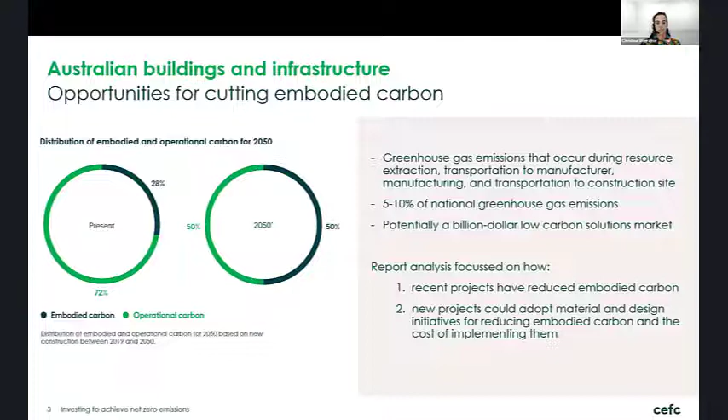And with that in mind, the analysis for the report focused on 2 key areas. Firstly, an analysis of how recent infrastructure and building projects have reduced embodied carbon. Now that's based on data from the ISC and the GBCA. And secondly, in an Australian first, an analysis of how new projects could adopt material and design initiatives for reducing embodied carbon, as well as the cost of implementing those initiatives.

Christina, can you please... now it changes. Oh, sorry.

So for the recent projects, the key findings were, on average, the sustainability rated infrastructure projects assessed are achieving a 33% reduction in embodied carbon. Now that's compared to a similar design with no sustainability measures incorporated. For the building projects, the average reductions were 15%, but we do note some individual projects are achieving significantly higher emissions reductions. Now for new projects, the analysis of material and design initiatives found that cost-effective solutions are available today to substantially reduce embodied carbon.

Depending on the initiatives implemented, it's possible to achieve a 5 to 18% reduction in embodied carbon, whilst also saving 0.4 to 3% in the cost of those materials. Key initiatives for cutting embodied carbon emissions whilst also saving on costs include precast concrete, low carbon concrete, and pleasingly engineered timber.

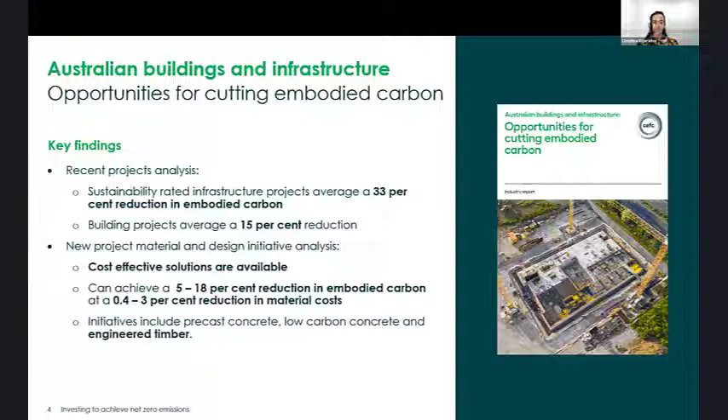The report found that the use of timber can reduce embodied carbon by up to 75% compared to the use of conventional steel and concrete. So on the back of these findings, we've just launched our $300 million timber building program. Now, this is a debt program to encourage mass timber construction across the property sector.

Projects will be considered on a case-by-case basis, but should utilise low-carbon engineered wood products in large-scale construction, involve appropriately sourced and accredited materials, and achieve sound embodied carbon outcomes. Require more than $20 million in CEFC debt finance, be commercial and deliver a positive return to the CEFC, comply with our investment policies and guidelines, and it's open to Australian-based projects across all property sectors.

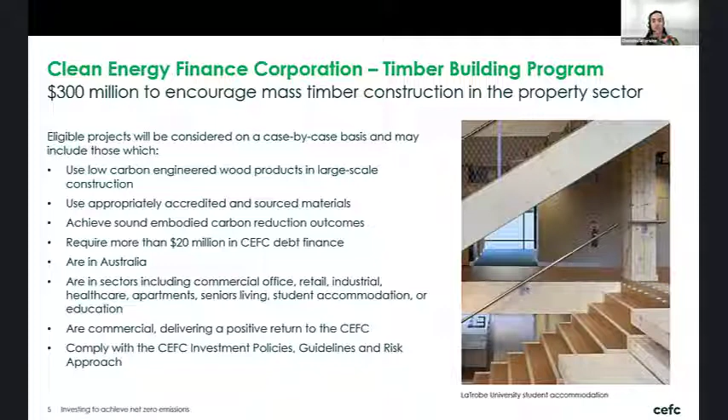So as well as helping achieve substantial embodied carbon savings through encouraging mass timber construction, we hope the program will also help develop local skills and experience, supply chains and delivery capabilities to catalyse even more timber-based building activity into the future. And if you'd like to know more about the timber building program, you can visit our website, which has a really handy fact sheet as well.

I'll now briefly touch on some of the investments the CEFC has already made to address embodied carbon. We have a $95 million commitment to the Roe Highway Logistics Park in Western Australia. That project uses Boral's low-carbon concrete that achieves up to a 42% reduction in emissions compared with traditional concrete. So this, along with some other features, will enable the project to achieve carbon neutrality.

A $75 million commitment to Frasers Property is targeting embodied carbon reductions across 2 of their industrial projects. And a $54 million debt finance commitment to Northcote Place in Melbourne is helping build sustainable townhomes featuring the Holcim ECOPact product. Now, this is a low carbon concrete that reduces embodied carbon by 30 to 60%.

Pleasure to be here, everybody, and thanks, Christina, for the great intro, and Paolo as well for setting the scene. So I'll talk a little bit more around the background and the details in terms of how the report was produced. It's pretty well documented in the report, which is publicly available as well, but it's always easier to get a verbal description of how the work was produced, and then more than happy to take any questions in this webinar or afterwards as well.

But as Christina said, the frame we went in with this one was to look at opportunities to reduce that upfront embodied carbon in Australian buildings and infrastructure. And by upfront embodied carbon, here we mean the raw materials, the manufacturing of construction products and materials, and the transportation to the construction site, but not looking at any carbon emissions or implications beyond that. So it's that upfront, which is a pretty tight scope.

And I just want to use that as a caveat, because looking at materials, it's very important around the maintenance, durability, end of life as well, specifically important for timber products, what is going to happen to the materials after the construction and end of life, for potential for reuse. So just want to frame that's the scope of this assessment.

And Christina already touched on it, but there was very much industry engagement and support throughout the process. So CEFC were a great partner to guide and instigate the development of this report and fund it. And then the Infrastructure Sustainability Council and Green Building Council of Australia provided the data, which was really good to get a view on the work that's been done over the last almost 10 years in the different areas.

So for Infrastructure Sustainability Council, we got access to some projects submissions in terms of what's been done with the material calculator in the IS rating tool, and for Green Building Council of Australia, got access to the life cycle assessments of buildings that's been submitted through the Green Star project. So that was almost 200 individual LCAs that we had the opportunity to look at and analyze.

And that's where we got the typical reductions in terms of embodied carbon that Christina touched on, in terms of that 5 to 15% range typical. So that's probably without pushing, because a lot of the focus to date has been on the operational aspects and the energy aspects optimization. So lots of opportunities for further improvements.

And then case studies are provided. A few of those will be spoken to after my bit here. But the industry engaged a lot in terms of providing information and data. So thank you specifically to InfraBuild and you mentioned EcoPact and Holcim, what they've done, et cetera, and timber industry and builders. So lots of good engagement and validation along the way for the study.

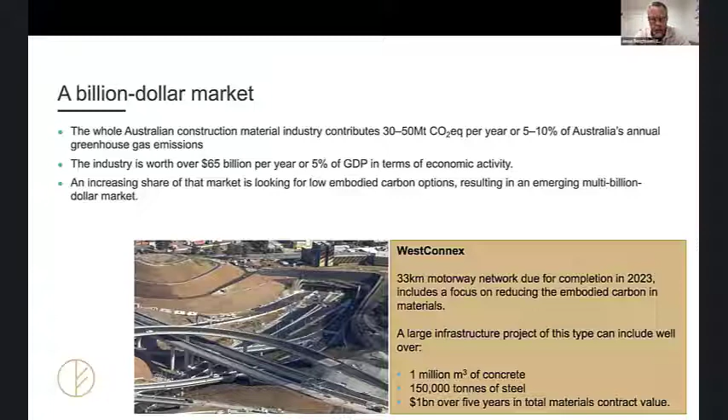So one project can make a huge difference, and 150,000 tons of steel, and overall $1 billion of material contract value. So that's just one project. So when we talk about the $1 billion market and opportunity, that's almost an understatement; it's a significant one from an economic perspective for producers and manufacturers that get on the front foot here, regardless of product and material class.

So the report is quite wide-ranging and broad, but I wanted to drill down specifically on the technical aspects to provide transparency and some details around that. So the methodology that we applied in order to look at the reduction potential in individual asset classes, and also the cost implications, which I'll talk more about in a second, was essentially to calculate the embodied carbon emissions for a reference case building and infrastructure projects.

So I'll talk a little bit more about what the building classes were that we looked at, but have that baseline of this is typical. And that's where we relied a lot on the GBCA data for Green Star in terms of providing that baseline in terms of quantities of materials and footprint. And then to look at what are the initiatives and opportunities to reduce. Obviously, that needs to relate to what are the hotspots and the material areas where you can achieve those reductions. And then to quantify the emissions reduction potential for those different initiatives.

And then what was quite new to this assessment, to combine the life cycle analysis and carbon assessment with the cost implications of that, which I'll talk more about, the marginal abatement cost curve aspect, in a second. And also talk about the enablers and barriers to implement a lot of these initiatives. I won't go too much into the enablers and barriers, but that's just to indicate that that's also part of the report where you can find information about that.

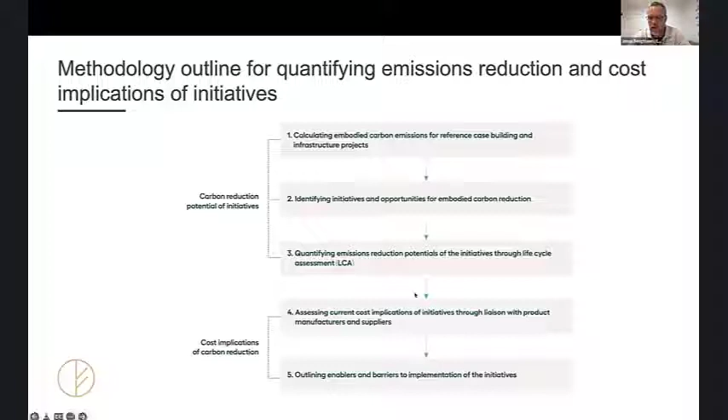Now, in terms of carbon reduction potential and strategy, the most potential is, as we all know, the earlier you consider it and think about it. So in the planning stage, that's when you can have the most radical reductions. Obviously, if you think about reusing assets and avoiding even the use of and the need for materials. So thinking more from a circular perspective, reuse and adaptive reuse, that's how you really avoid

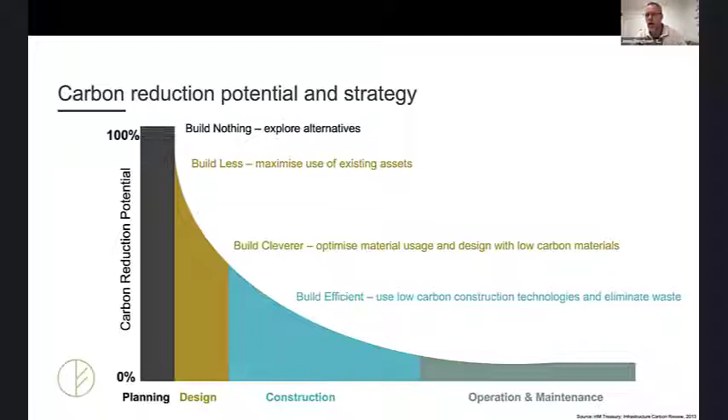carbon. And then it's on a falling scale: build less and maximize the use of existing assets, build smarter, build more efficient. But the opportunity and potential to reduce is also reducing the further down the life cycle you come. Now, most of the analysis here is not in the early stages. It's more in the cross section between design and construction. So that's just a caveat as well, that when we talk about carbon reduction potential, it's already way down this kind of scale in terms of opportunities that we're looking at. So it's not capturing the whole holistic opportunity to reduce carbon in the built environment.

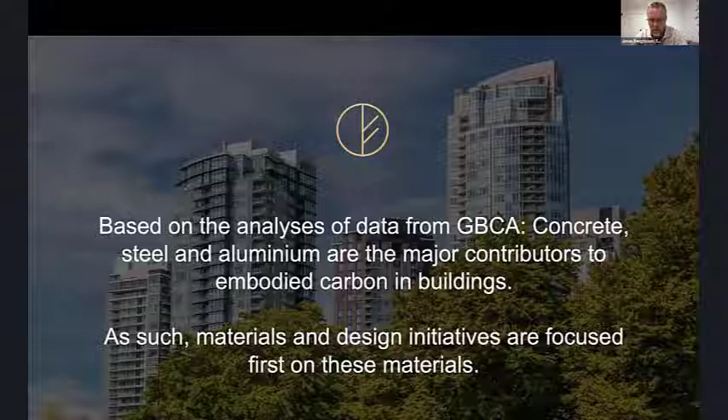And so this is probably conventional knowledge, but looking at the Green Star and GBCA lifecycle analysis baseline, concrete, steel, and aluminium are the major contributors to the embodied carbon in buildings. That's no surprise. So a lot of the initiatives that we looked at were from that starting point, about how can we build with lower embodied carbon implications, focused a bit around the use of these materials and substitutions. So that was the initial focus, just to frame it up a bit.

Now, in the initiative types, we looked at both design and material. In the design aspect, for the material types of concrete, timber, and steel: opportunities to use precast elements instead of in situ, high strength concrete, substituting steel with engineered timber, high strength steel opportunities. And in the material selection, opportunities to include additives to lower cement content, use supplementary cementitious materials, which is commonplace in the concrete industry already. Looking at carbon neutral concrete and more leading or innovative, perhaps, geopolymer concretes.

Looking at carbon neutral steel, steel produced predominantly using renewable energy. And that gives an indication as well around green hydrogen and use of hydrogen in steel making, an order of magnitude of what the reduction potential is. And same with aluminium, so sourcing aluminium produced, powered by renewable energy. So those were the type of initiatives that we looked at predominantly.

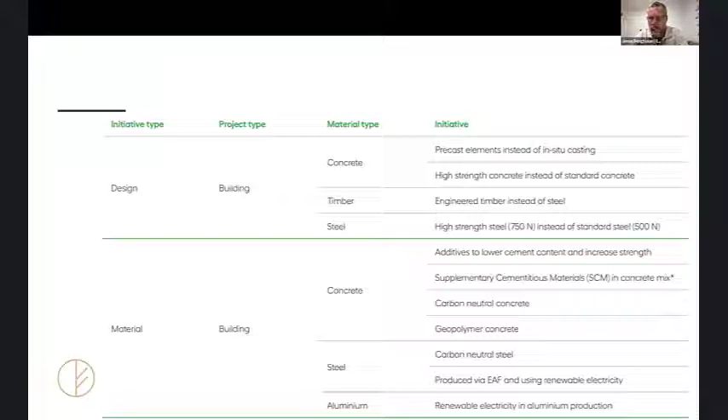So what we did with this was we calculated the carbon reduction potential if you deploy a degree of uptake of those initiatives. So say that we use 10% uptake of, say, precast instead of in situ, 30% and 50%. So we didn't look at a complete replacement. So looking at how we can reduce structural steel with engineered timber, 10%, 30%, 50%, not completely, just to keep a conservative aspect, knowing that there are limitations around design in some aspects. So this would be the opportunities in terms of carbon reduction. Think about this as the x-axis conceptually, but then the cost aspect as well.

So this is a different example, but say we take LED light upgrades. In a building in operational stage, you can reduce a certain amount of overall life cycle carbon by having more efficient lighting. What would be the cost from a carbon reduction perspective over the life by using LED lighting instead? And you would then save money over time by having more energy efficient lighting. So that would be a carbon reduction opportunity where you end up saving money from a CapEx and OpEx perspective. So we looked at all the different initiatives from this payback, if you will. How much carbon can you reduce, x-axis, and what's the cost implication of reducing carbon in that way?

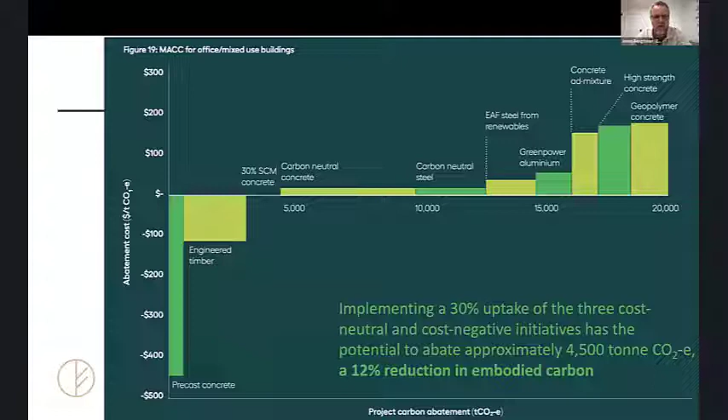And then you can go in and look at the other opportunities further and see whether for the project specifically or with the suppliers available, there's opportunities to include more initiatives. So this is just reflecting on what we see today, pretty much that 10-15% reduction is readily available, but much more potential to uncover.

And this is the same view, but for industrial buildings. And you see largely the same design and material initiatives come up with precast concrete and engineered timber, cement substitution in concrete. And when we looked at this to pick out some of the insights, across the project we can achieve a cost saving of approximately $365,000, so about 3% of the project material cost, by adopting those low carbon, cost effective initiatives. So that gives an indication around what's available now, where to look for the biggest bang for buck, and where to drill into the cost implications.

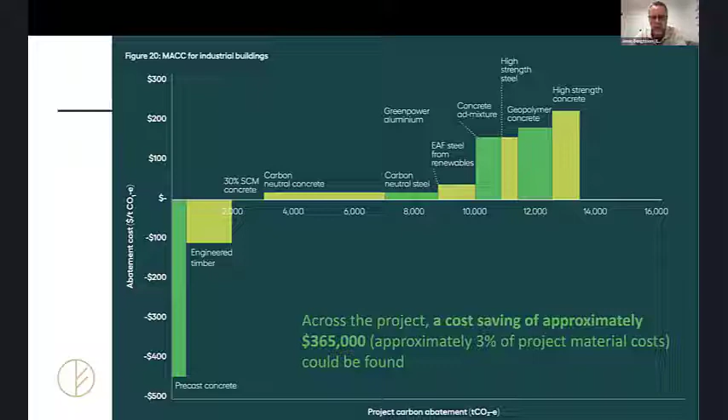So hopefully this makes sense and is useful as a view and a framework for looking at reducing cost and embodied carbon in materials to go after that opportunity for carbon reductions. Taking a slightly different lens and looking not just at project material selection specifically, but what else is possible. Think about it as order of magnitude reduction potential that could be achieved.

So remember, we have about 30 to 50 million tons of carbon emitted every year that goes into construction materials and products. What if all material suppliers switch to green power today? Now that's not possible, but what if? That would be the order of magnitude of reducing the emissions by 7 megatons of carbon dioxide per year, from switching to renewable energy. What if 1 in 10 projects use the lowest carbon materials available? There's a potential of 1 to 3 million tons of carbon dioxide equivalents.

Now, this is where environmental product declarations and supplier LCAs come in for comparing. Not all products come with the same carbon footprint. There are variations because some suppliers have invested more in low carbon production facilities and supply chains. So there is variation between suppliers, and EPDs are a great way to evaluate. And there is potential if just 1 in 10 projects say, I'm going to select a supplier with lower footprint. 1 in 10 projects go carbon neutral using offsets: that's 3 to 5 megatons of carbon dioxide.

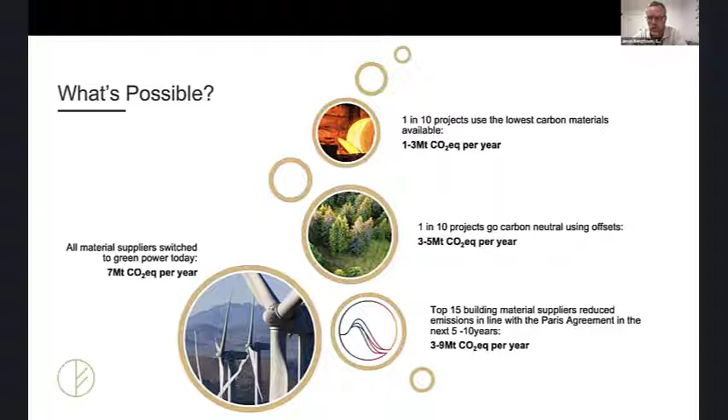Top 15 material suppliers reduce emissions in line with the Paris Agreement, so that's decarbonization towards the 1.5 degree warming target. That will reduce between 3 to 9 million tons of carbon dioxide per year of that total 30 to 50. And we also see a lot of suppliers and producers already signing up to this decarbonization initiative and following the science-based targets. So that's already well on its way, both in Australia and internationally.

So finally, from looking at our experience, talking to industry bodies, talking to projects, we can probably sum it up into 6 key findings. One is that there are substantial emission reductions possible already, and they are happening, and we'll talk about that in the case studies in a second.

And targets to reduce embodied carbon should play a key role in the sustainability vision. So again, something that we see in industry, from government and from construction firms and developers, they are starting to implement targets that cover the scope 3 emissions and the embodied as well. And as we've seen, the targets and goals should be developed in the earlier stages of the project lifecycle as well, because that's when you have the most opportunity to reduce, really, and the opportunity to find the most cost savings and benefits.

And all project stakeholders have a role to play in addressing embodied carbon. It cuts across absolutely every profession, from suppliers to engineers, architects, client side, rating agencies like Green Star, etc., procurement department, builders. Everyone has a role to play here, a significant role.

And investment in embodied carbon reductions can reduce costs. So I just provided one example, and I'm sure that the case studies will talk a little bit about the cost effectiveness as well. And this is what we think, and what the analysis shows, that going down this journey will essentially increase your competitiveness and set you on a path of a differentiator, because you're going to develop a different way to do things and learnings that are going to save you money and save you carbon in future projects as well. So that's a bit of a snapshot.

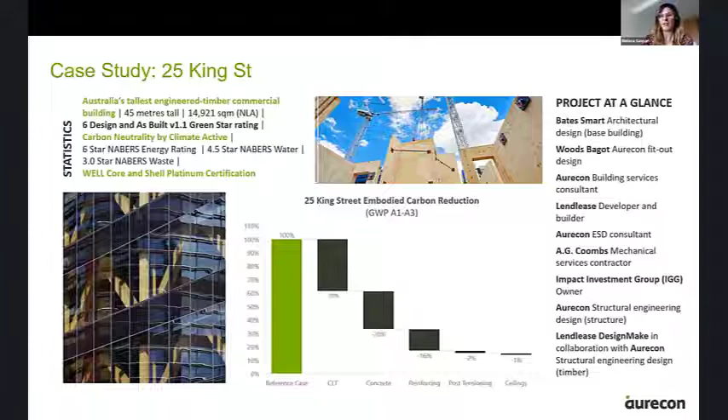There is quite a lot of documentation available for this particular project. There are some existing presentations and webinars on Wood Solutions that deep dive into the structural design and construction of this project. So I'll try to keep this fairly brief and focused more on the LCA side of things.

This project, the La Trobe Uni Student Accommodation, or North and South Apartments, as it's now known, was completed in 2020. I think it's still the largest mass timber, certainly CLT project in Victoria. It's a student accommodation building, 624 beds, approximately 18,000 square metre GFA. So it's quite a substantial structure in its own right. The building has achieved 5-star Green Star certification as built.

As the CEFC report speaks to, there were some quite substantial savings in the global warming potential of the building through the use of timber as compared to an earlier reference design for the project, which was in a more conventional reinforced concrete.

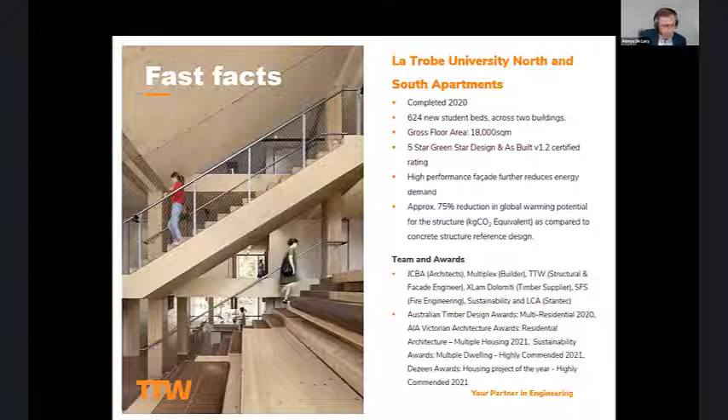So predominantly CLT construction, the timber was imported from Italy. That decision was largely driven by the builder and their procurement processes, cost driven, but also importantly for this project, one of the big considerations was program, and the local suppliers who would have had the capability to supply this project at the time weren't able to meet the required program. So the timber was supplied from overseas.

There was also a lot of concrete in the project, similar to the case study that Melissa's just referred to. We took the approach of using concrete for the substructure and a sort of concrete podium and a lot of the cores. So a lot of energy was also put into smart selection of materials and concrete mixes for those aspects, which also plays into the overall reduction of energy used in the building.

The client made a decision to go for a more high performance facade, something more akin to a passive house standard, albeit they weren't targeting passive house. And so there's also quite significant savings in the operational energy for the building moving forward.

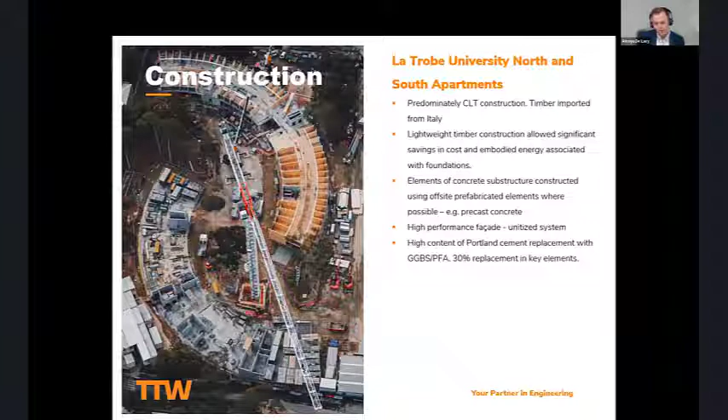So just a snapshot of the life cycle analysis for the building, and consistent with Christina's presentation earlier, we've focused on modules A1 to A4, so right from the manufacturing process through to the transport and delivery of the materials to site. I think there's quite a lot of learning still to go within the broader industry around how we account for the remaining modules, but for the time being, the focus is typically on the modules A1 to A4

or 5. So there was around a 75% reduction in the embodied carbon used for the structure. That's just the structure only, so it doesn't include all of the fit out components and non-structural elements, and of course doesn't include the operational side of the equation, which is in itself quite significant. So this probably translates to something around 15% reduction of the total life cycle carbon for the building.

And that's pretty much my presentation complete. Happy to answer any questions.

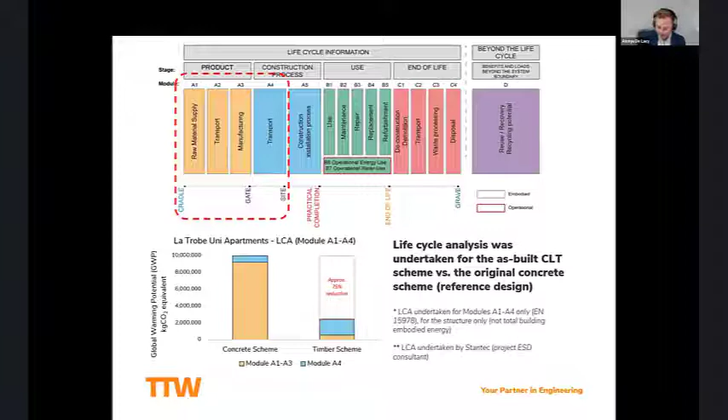Very good. Atreyu, thanks a lot. Very interesting presentation. I would now start by looking at the questions that we received from the attendees. They are ranked also by some of you in terms of their interest, but there's plenty of interesting questions.

So I will start with the one from Mike Knight, and speakers and panelists may like to have a look as well: how does global supply of timber look over the next 30 years if we achieve objectives towards transition to timber in Australia and internationally? So that's a broad question, and I open the discussion to the panel, to Christina, Jonas.

Maybe you are not timber procurement specialists. Melissa and Atreyu have been exposed to that. I have been exposed to that a lot, but honestly, I would like to hear the opinion from Christina and Jonas first, and then the rest of the panel. I'm happy to start by confessing that I don't know. Okay. How would you get your knowledge then if you were asked professionally by one of your clients to answer on this point?